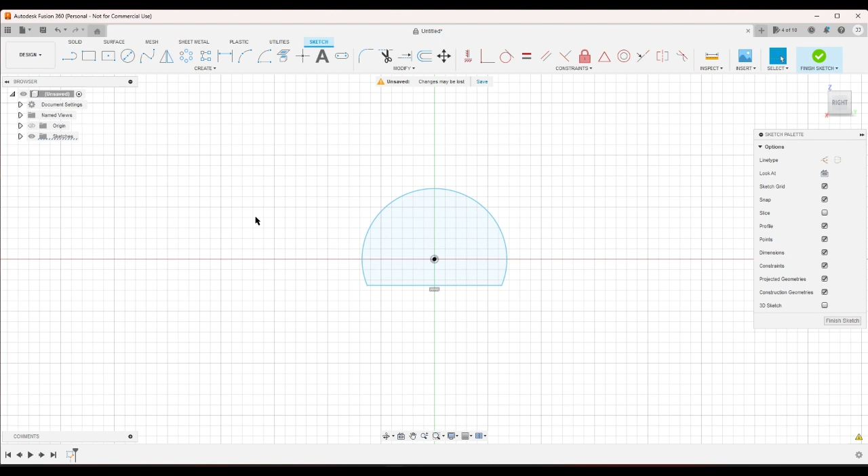So, because the hole in the baking powder is shaped like that, right? Except it's rounded off. So I measured out the diameter of that hole there. It says 53.3 millimeters. I'll make it 52 millimeters. And I'll make a line that goes across. And I'm going to go ahead and offset this by about 1.2 inwards.

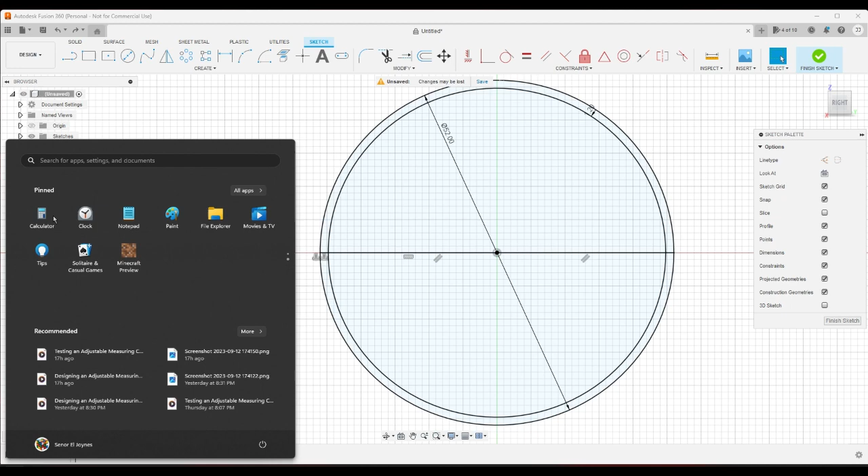Alright, so now since this is 52 millimeters, that makes this 52 minus 2.4. So I'm going to make a line here, make it 52 minus 2.4, and I get 49.6. Okay. I did not feel like pulling out a whole calculator just for that. Oh, you know what? I have to pull out a calculator anyways. Hang on. Where's my calculator? There's my calculator. Okay.

49.6 divided by 2 is the radius, 24.8. Square that, multiply it by pi, and then divide by 2, gives us an area of 966.1 square millimeters.

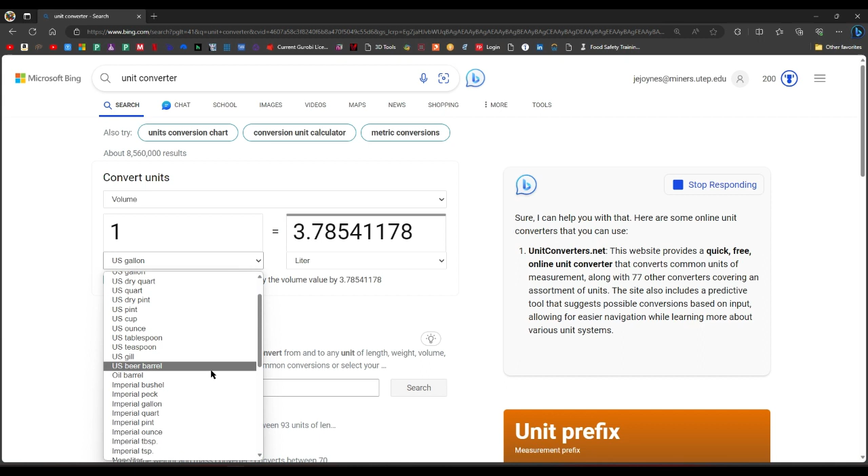Okay, so now we're going to pull up Google, and is this Google? No, it's Bing. Well, Bing has a unit converter too. I'm going to go for volume. I'm going to go for cubic millimeter. And I'm going to go for US tablespoon. And 1 tablespoon is 14,786.7648 cubic millimeters.

So I'll round this to 966 square millimeters, and then I'll round this up to 14,787 cubic millimeters. So now I've got 14,787 divided by 966 is 15.3 millimeters. Alright. So I'll go ahead and extrude this by 15.3 millimeters times 2. I might as well make it 2 tablespoons.

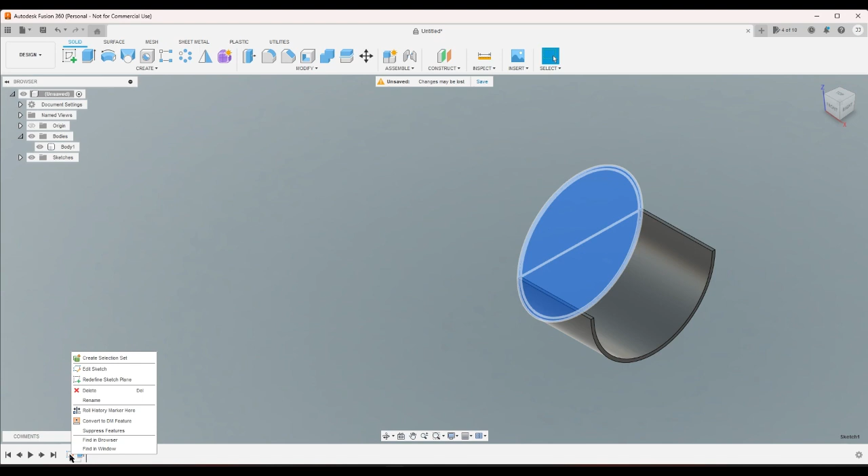Gonna take the sketch and make it visible. I'm gonna go ahead and extrude this whole thing by negative 1.2. And there's that.

Okay, so now what I'm going to do is pull up this and go from tablespoon to teaspoon and go to a quarter teaspoon. 1232.2. That's going to be very small, because if I pull up the calculator, right, I've got 1232.2 divided by 966 gives me 1.27 millimeters.

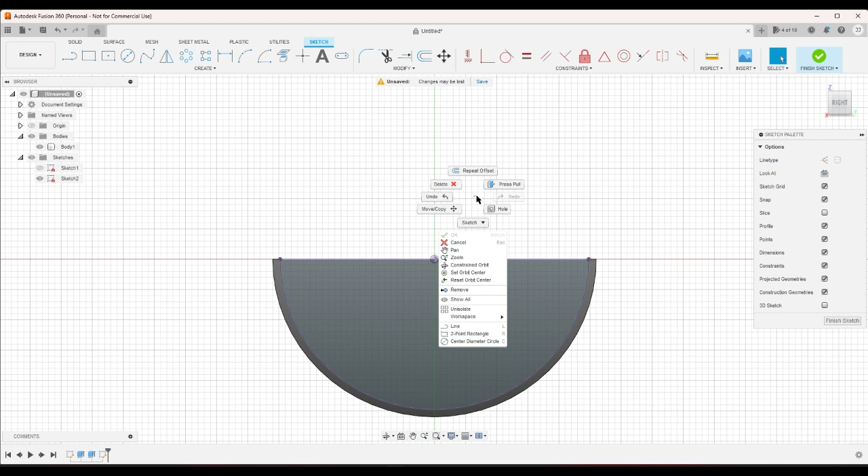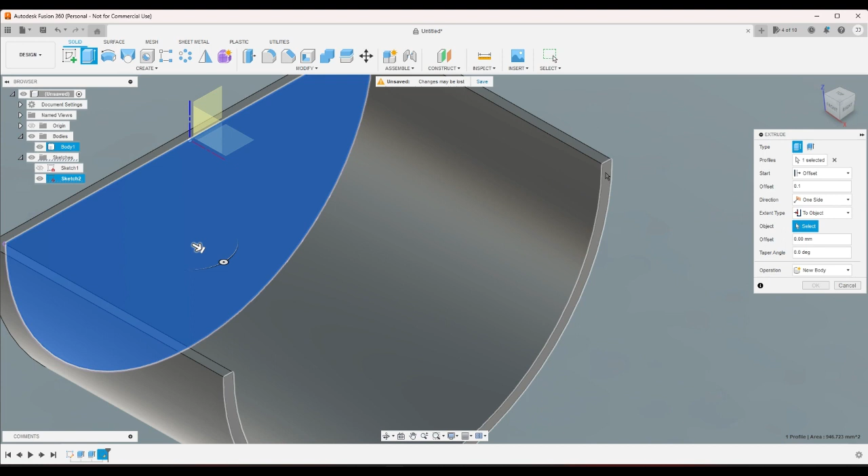So what I'll have to do is, okay, I'm going to project this. I'm going to offset this. Can I? No? Okay, I'm going to go ahead and delete that so I can offset this. Negative 0.25. This will go all the way. Gonna extrude this. Gonna start at an offset of 0.1, and then go all the way to here. And now that's body 2.

Okay. So this is going to be the piece that moves in and out, right? So now I got to make a line here and make it go 1.27 millimeters. And I don't like that right now. I don't like where that is. I'm going to go ahead and change this because I actually don't want it to be there. I'm going to cancel that and then I'm going to change it again.

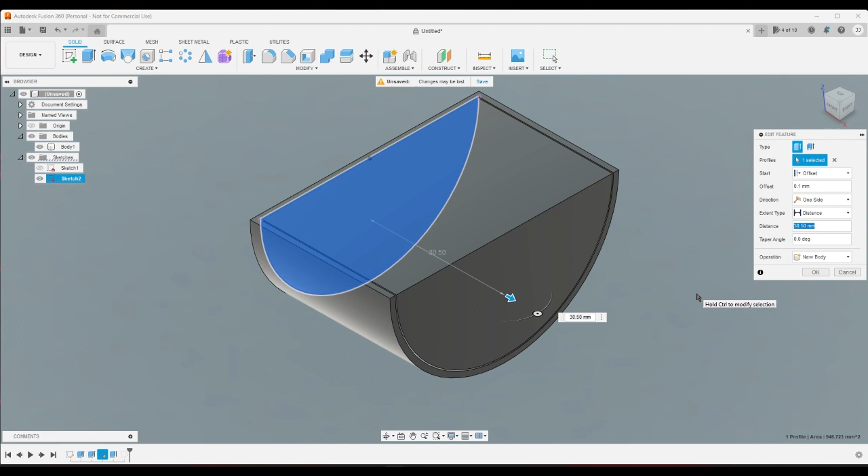I'm going to change it to distance. It says 30.5. I'll make it 40. Yeah. The reason I'm making it bigger is so that I can add a piece to the top of the whole spoon that extends out the back, that this will come into.

So I'm going to go ahead and start a sketch here, no, I'm not going to do that. I'm going to delete this sketch. Now I'm going to start a sketch here. It called it sketch 4 anyways. 1.27 is very tiny, because if I put a hole here, I was wanting to make it about 2 millimeters.

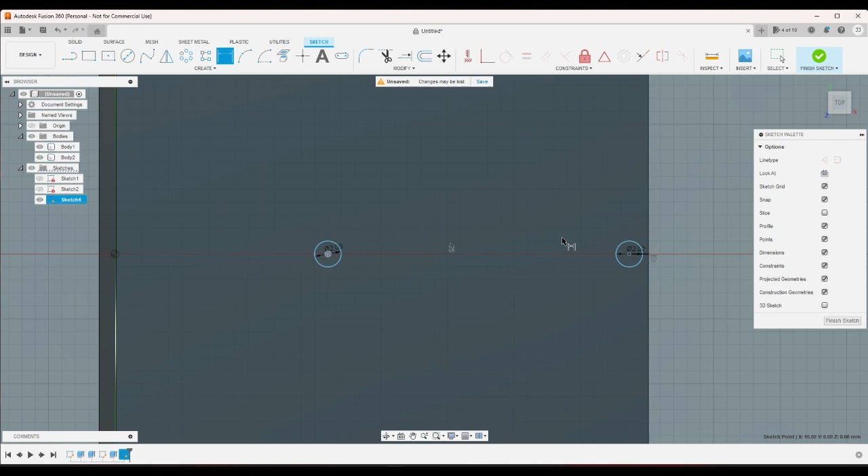Okay, and then I make this perpendicular to this, and then I make another 2 millimeter hole. Put this on the center line with it, and then move these, make that 1.27. That's rough, right? And then make another hole, and then another one, so I get 1.27 times 2 to make a half of a teaspoon. And I really don't know if that's going to work, but I'll design this anyways. So that's a half a teaspoon.

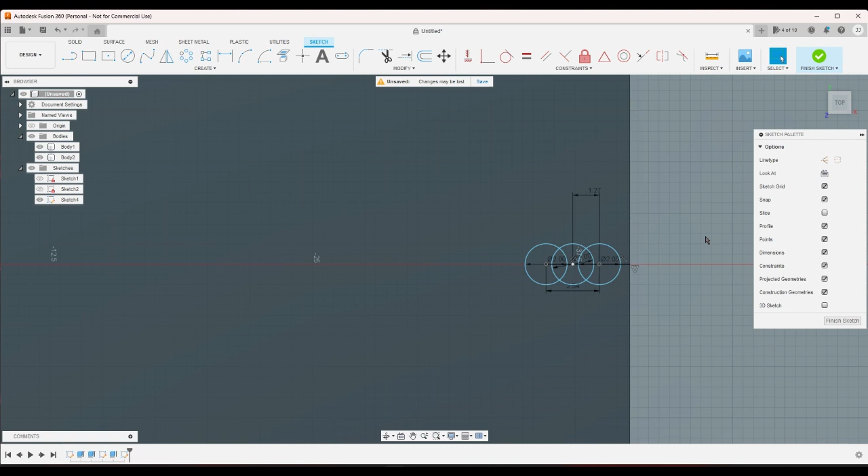I just realized there is also an eighth of a teaspoon. And there's a third of a teaspoon. Anyways, I'll make the whole teaspoon now. So that's 1.27 times 4, right? And that's the whole teaspoon, right? So I've got, this is the 0 point, this is a quarter teaspoon, this is a half teaspoon, this is a teaspoon.

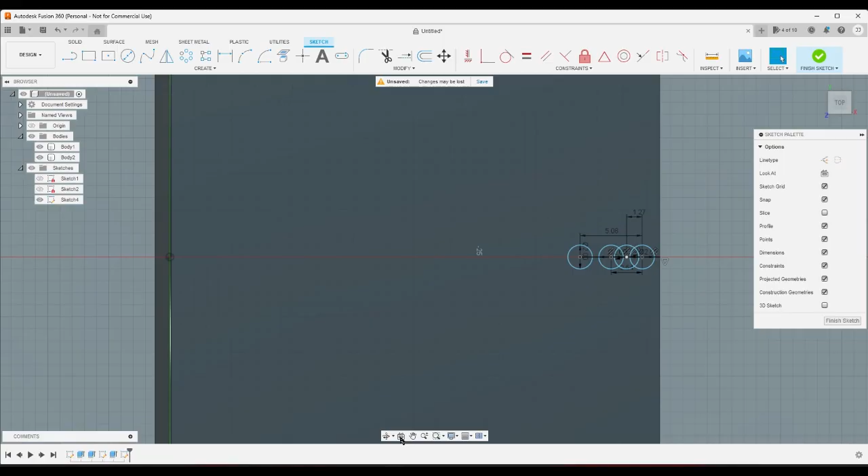Then if I go up to a quarter tablespoon, I get 3,696.7. So 3,696.7 divided by 966 is 3.82 millimeters. So if I make 3.82, that is almost, that is interesting. That's less than a teaspoon. In fact, that's like 3/4 of a teaspoon.

Let me see that. 1.27 times 3 is 3.81. Yeah, that's 3/4 of a teaspoon. 3/4 of a teaspoon is a quarter tablespoon. So I'll take that, make it go 3.82 times 2. That's a half a tablespoon. And then 3.82 times 4, that's a tablespoon.

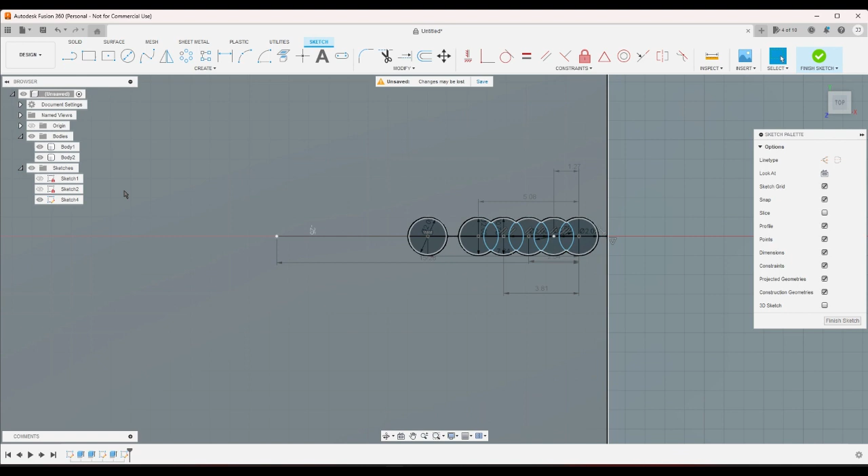And then I do it 3.82 times 8, and that is 2 tablespoons. And they are very close together. So something I can do to make them farther apart is change this original sketch to make it smaller so that it would have to be longer. And I think I'm going to do that. So I'm going to change the outer edge to, say, 46.

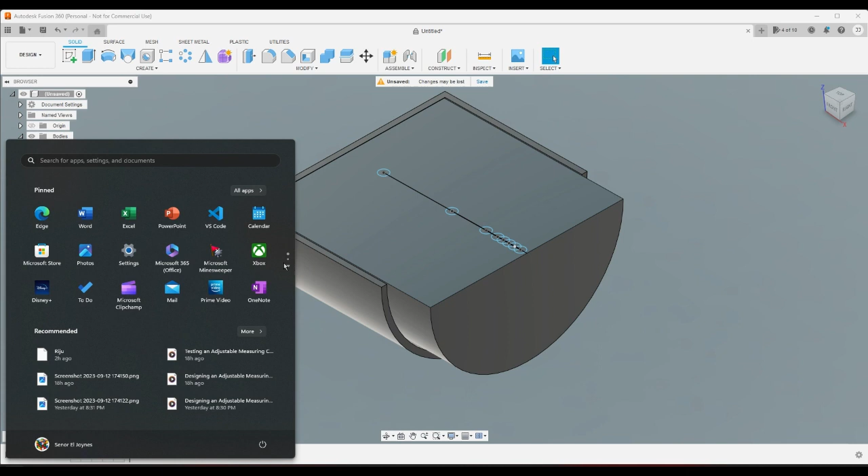So now I've got to calculate, where's the calculator? I closed the calculator. So now I've got to calculate the area with that. So then 46 minus 2.4 is 43.6. Square that. Multiply by pi. And then divide by 2 because it's a half circle. And I get 2,986.02. So 2,986 cubic millimeters. Or square millimeters, sorry. That doesn't make sense. Hang on. I said 46 minus 2.4 is that. Square that.

Okay, that's wrong. Hang on. 46 minus 2.4. I don't know how to use this stupid calculator. Square it. Then times pi. Pi r squared. And then divide by 2. 2,986.02 square millimeters. That doesn't make sense because I had 52 minus 2.4, and then squared, and then times pi, and then divided by 2 is 3,864.4 square millimeters.

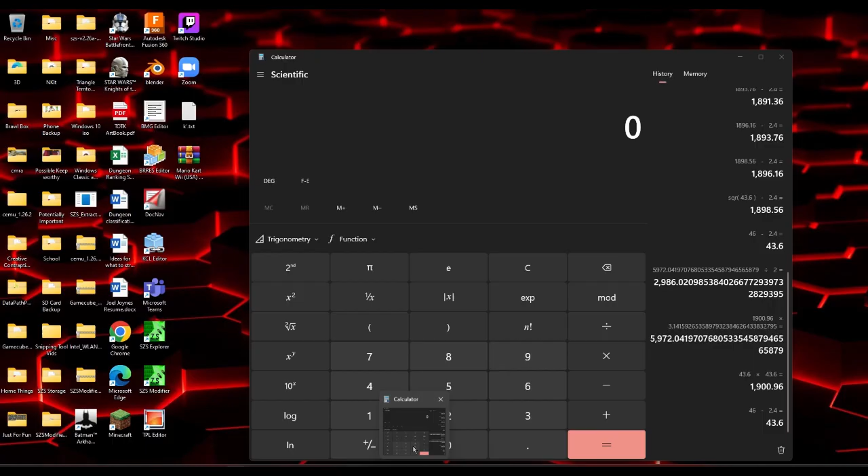And then if I go to 2 tablespoons, I get 29,573.5. And if I do 29,573.5 and divide that by, what is the most recent number in here? Square 49.6. Okay, times pi is this, then divide by 2. So I divide by 3,864.4 and I get 7.65. That's how many millimeters that would have to be. I didn't do that right. That's interesting. Okay.

So, I'm going to change this to be about 30, right? I'm going to change it to be 32.4. Alright, so the internal area is going to be pi times 900 divided by 2, because 30 squared is 900. Multiply that by pi. And then divide by 2, and I have this many square millimeters is the area of that half circle. So now, I'm going to go ahead and take the 2 U.S. tablespoons, 29,573.5295, or call that 0.5.

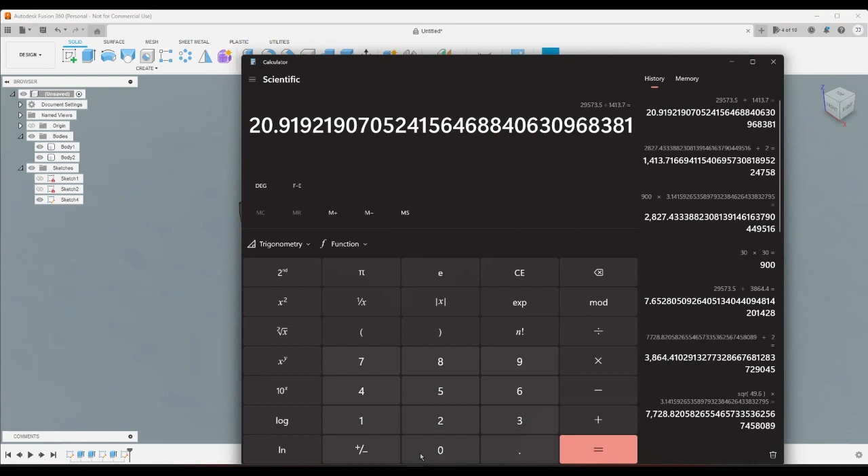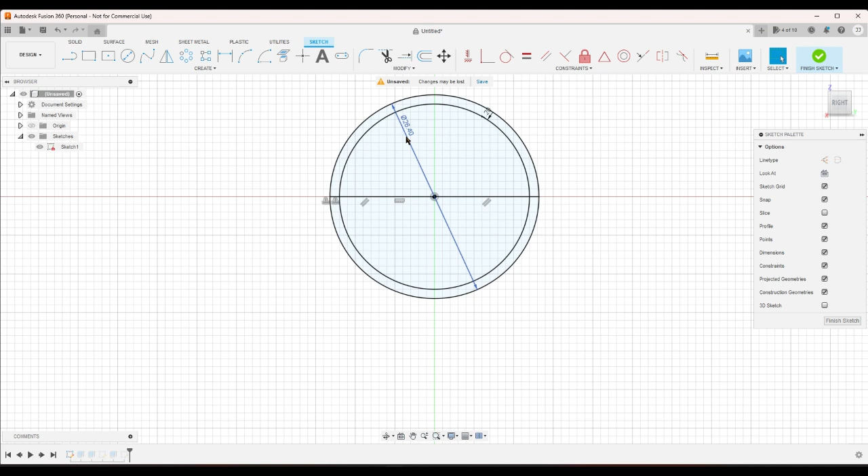So, 29,573.5, divided by 1,413.7 gives me 20.9, or 21. So I take this and I make it 21. I don't like that. That's already shorter than it should have been. Let me get rid of this second body here. I think the squarer this cavity looks from this angle, the better it will be. So, let me reduce this again to about 26.4. Okay. 26.4. Alright. Minus 1.2 on both sides is 24. Okay.

So now if I go to my calculator, 24 squared. Oh, I know what I did wrong. I know exactly what I did wrong. I forgot to take half the diameter. So, if I go all the way back to 46.4, right? Now, 46.4 divided by 2, because that's the radius that I need, and then square it, and then times pi, and then divide by 2, gives me 845. That's still going to be too small.

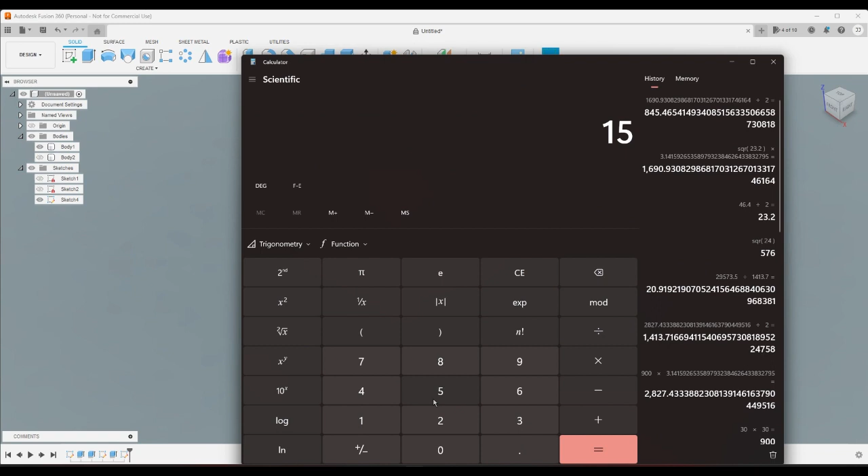So I'm going to actually change this to, probably the 30s will work better. 32.4. Right? So that'll be 15 squared times pi, then divided by 2 because it's a half circle, gives me 353.43 square millimeters. Now I take the 2 tablespoons, which is 29,573.53, divided by 353.43 gives me 83 millimeters. That's too many. Because that's taller than anything.

So, somewhere in between 32.4 and 56 is the magic number. Call it 42.4, so that would be 40, right? Half of 40 is 20, so 400 is the square of that, right? So 400 pi divided by 2 is 628.32 square millimeters. I take the 29,573.53 divided by 628.32, and I get 47.06, right? Which I can probably just make 47. I'll make 48.

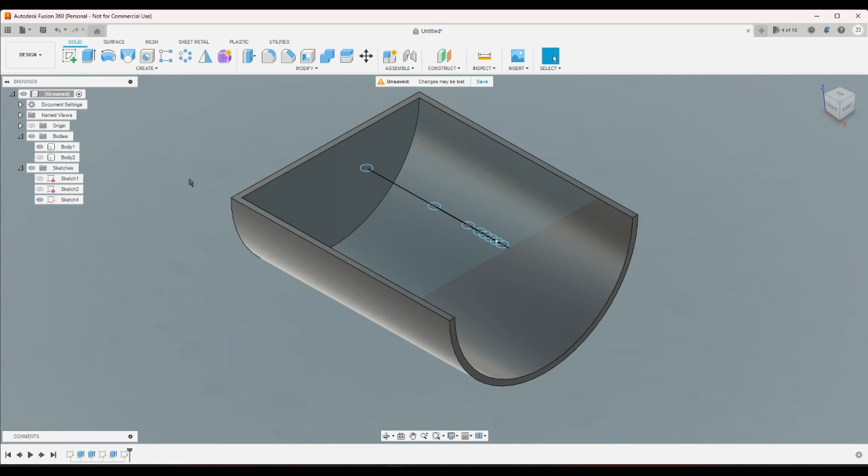But now I can take body 2 and then, it was 48. Okay. I'll make the extrusion for body 2. No, that's not the extrusion for body 2. This is the extrusion for body 2. And make it 58 for now. Okay. Actually, this should be 58. And this should be 68.

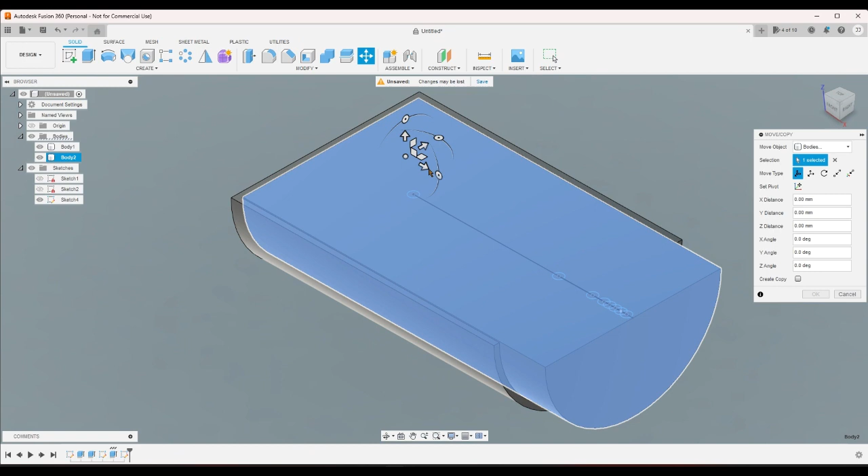That way on this sketch, this one will be 48, right? Because I would move this in this direction by 48, right? That would be 2 tablespoons, and there would be this much holding it together. So I should also have more space to make the holes that I wanted.

So if I take and go from 2 US tablespoons to a teaspoon and make it a quarter, I get 1,232.2 cubic millimeters, right? And I'm working with 628.32, right? So I take 1,232.23 divided by 628.32, and I get 1.9 millimeters, which is better, but it's still pretty short. But I'll take it.

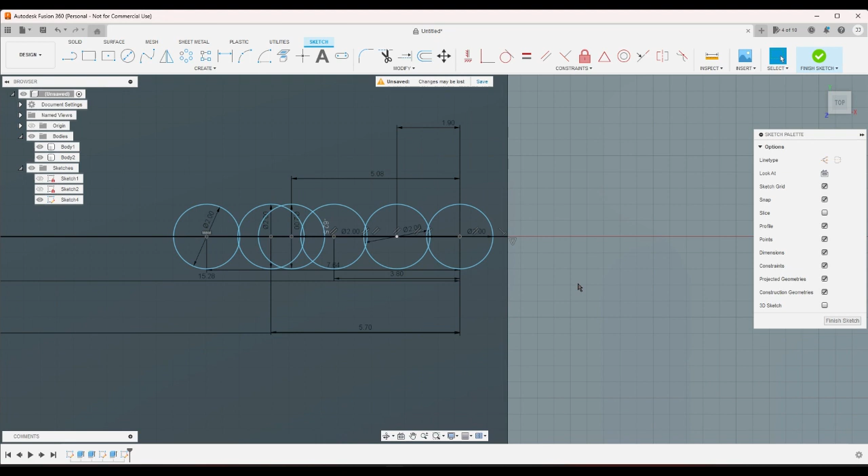1.9, and then 1.9 times 2, and then 1.9 times 3, and then where was this one? This is the 1.9 times 2. This is the 1.9. So this one right here. 1.9 times 4 gives me the teaspoon. And then this one here is going to have to give me the half tablespoon, which should be 1.9 times 6. But I don't think so.

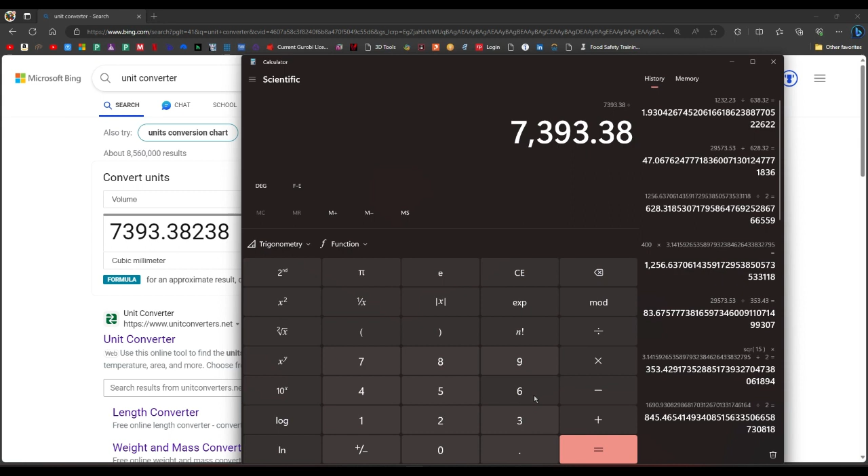Let me just check. So if I go to tablespoon and go to a half, I get 7,393.38. So 7,393.38 divided by 628.32 is 11.77. So this should be 11.77, gives me a half a tablespoon. Control Z. This one is that. Alright. And then that's a half a tablespoon. This is a tablespoon, right? Because I would just multiply by 2 to get a tablespoon.

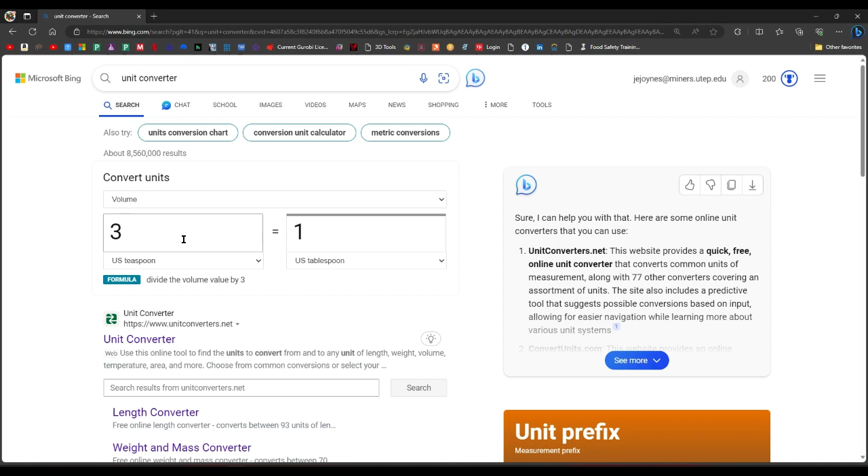And then we've got 0, quarter teaspoon, half teaspoon, 3/4 teaspoon, which is also equal to 1/4 tablespoon, which makes sense because 3 teaspoons make up a tablespoon. If you look at this, it goes U.S. teaspoon and U.S. tablespoon. If you put 3, you get 1. Okay, yeah, it's 3 teaspoons for a tablespoon. So that makes sense.

Have I ever used a recipe that called for 1/8 of a teaspoon? I think I've seen 1/8 of a tablespoon. Right, so this was 23.54, this is the tablespoon, 23.54. Let me see what 23.54 divided by 8 looks like.

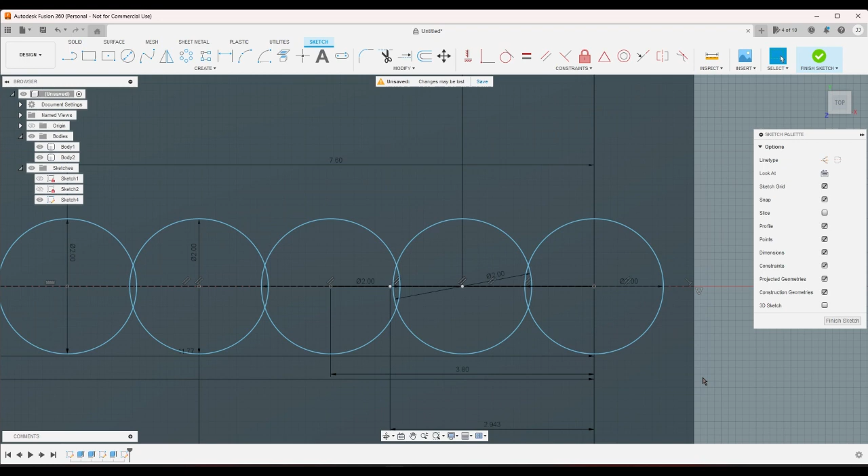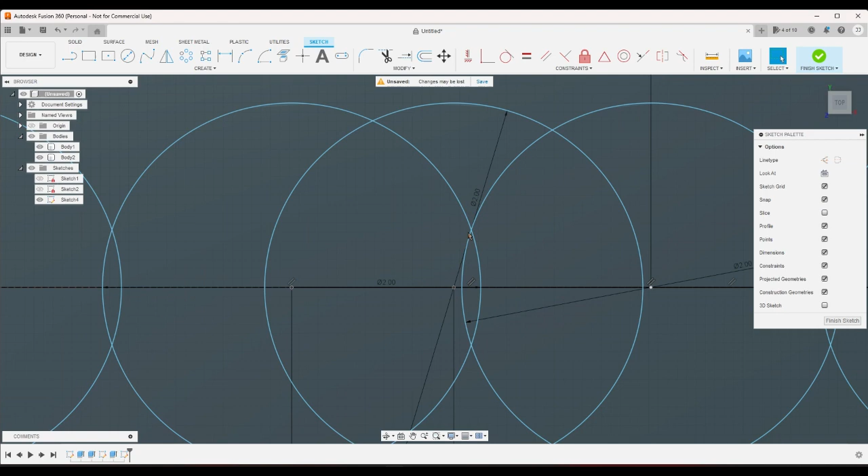Okay, and then there's 1.9 times 2. Let me just Google it. 23.54 divided by 8 is 2.943, and I've got a 3.8, and I've got a 1.9. There it is. And that is 1/8 of a tablespoon. I do not like that. I do not like that one bit.

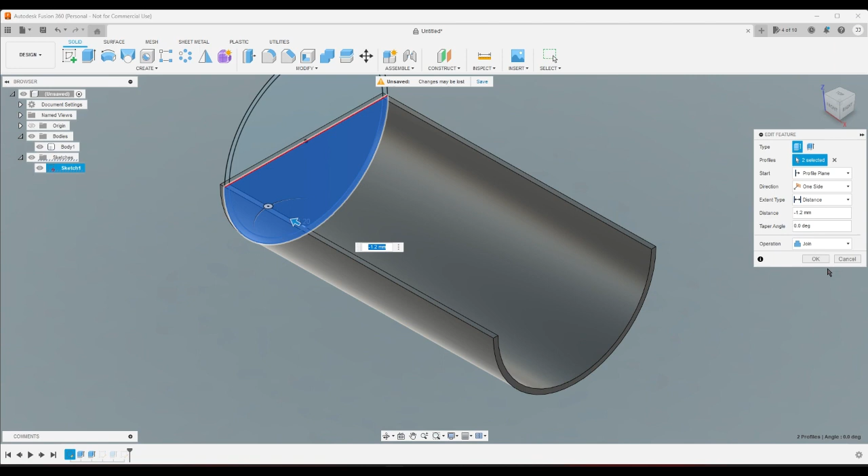What if I took this and took the 58, changed it to plus 10, plus 10, 48 times 1.25. And then I take this, no, this one, 48 times 1.25 plus 20. And then I take this sketch and then multiply everything by 1.25. Except for that.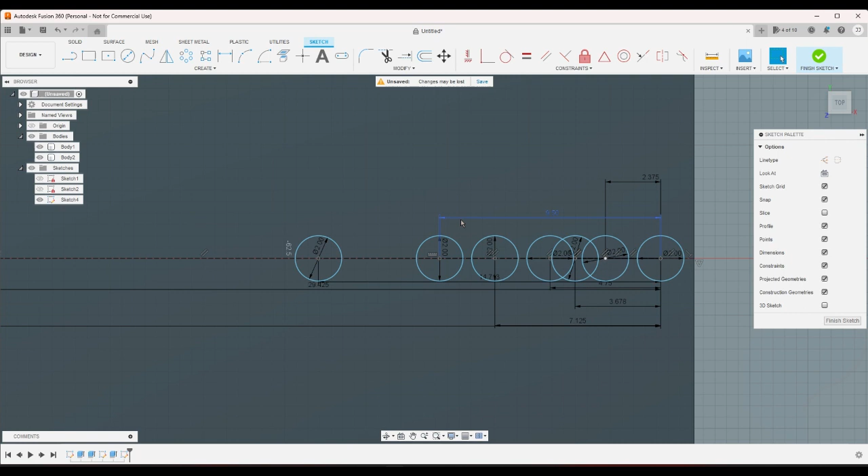Okay. So I've got this one, I've done this one, I've done this one, this one, what the heck? Okay, this one, okay, and then this one, and this one. Okay, everything's times 1.25. This might have issues, but other than that, it should be fine.

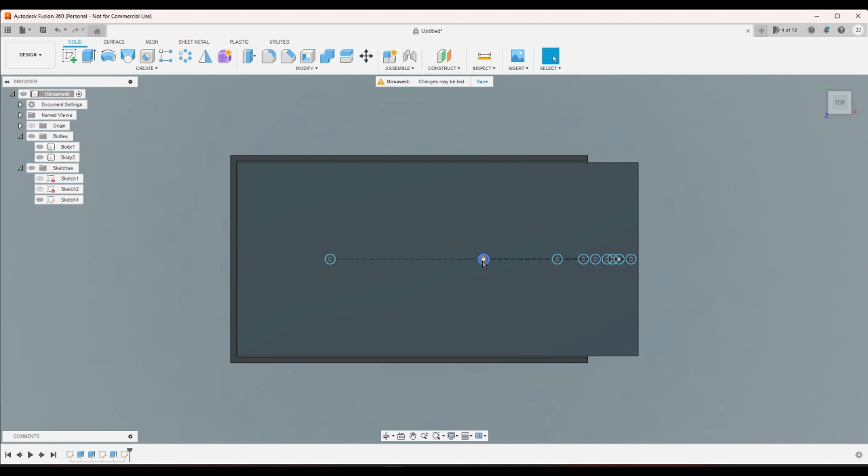All right, and then 60 is really tall. It's really darn tall, but it can still go inside of the baking powder. It does become really annoying though, because if I ever need 2 tablespoons of baking powder, which I never will need that much baking powder, right? I'm probably gonna only ever need a tablespoon. So okay.

So if I extrude all of these into smaller holes, into little holes, -3, just to be safe. This is what I'm scared of. This is what I'm scared of.

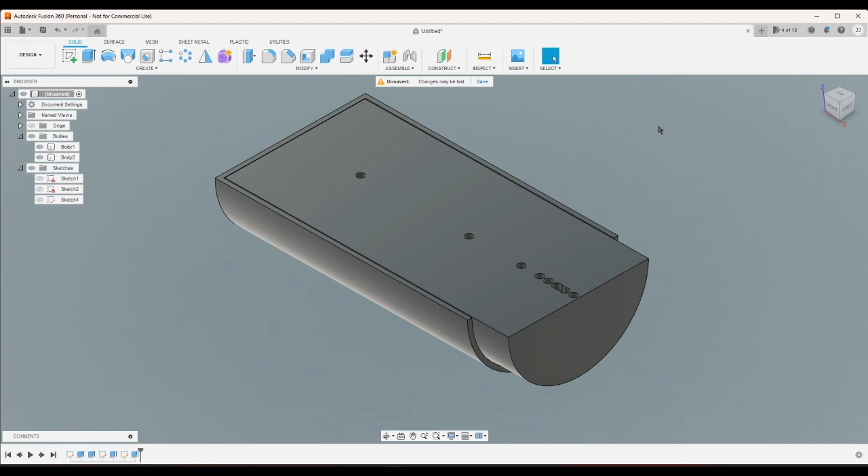Okay, so now what I'm going to do is I'm going to make a sketch here. I'm going to go ahead and make a rectangle that extends past this. I'm going to make this collinear with this. Then I'm going to project this hole here. That's the 0.

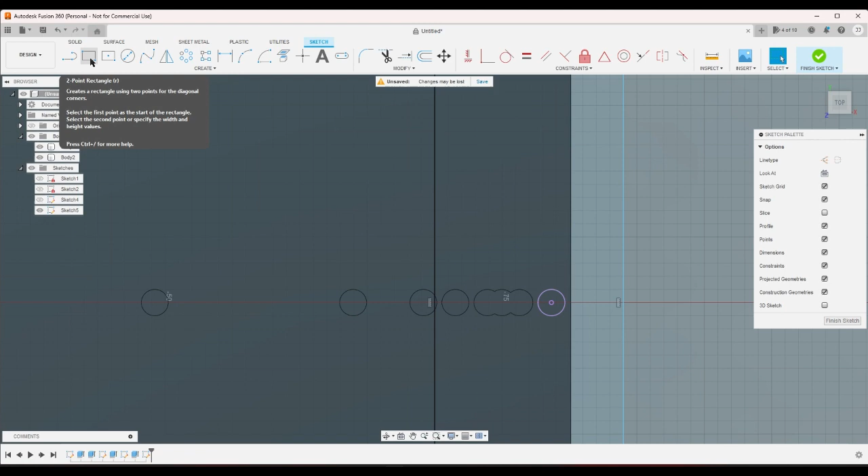Then I'm going to make another rectangle and I'm going to make this, then I'm gonna go ahead and make an offset of this rectangle, make it 1. And then I should be able to move this up and down, right? Yeah, okay. So now I'll make this one collinear with this.

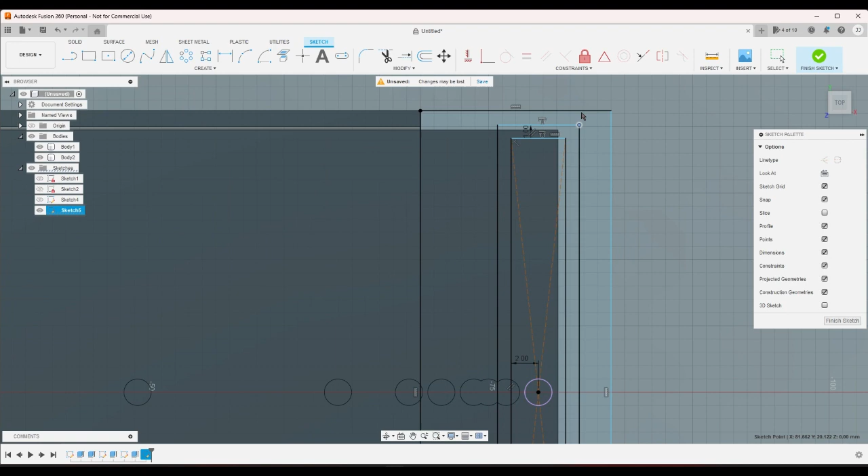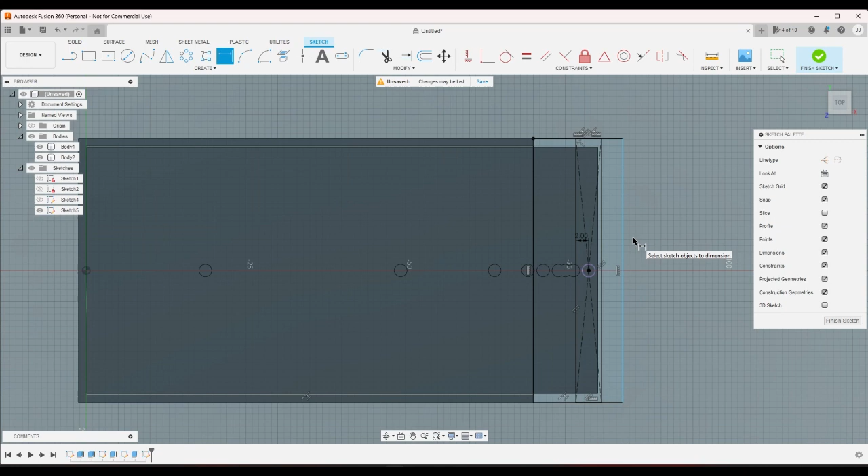Fail to solve. Did something snap to something? Okay. Okay, whatever. Just dimension from here, there, then offset 1.

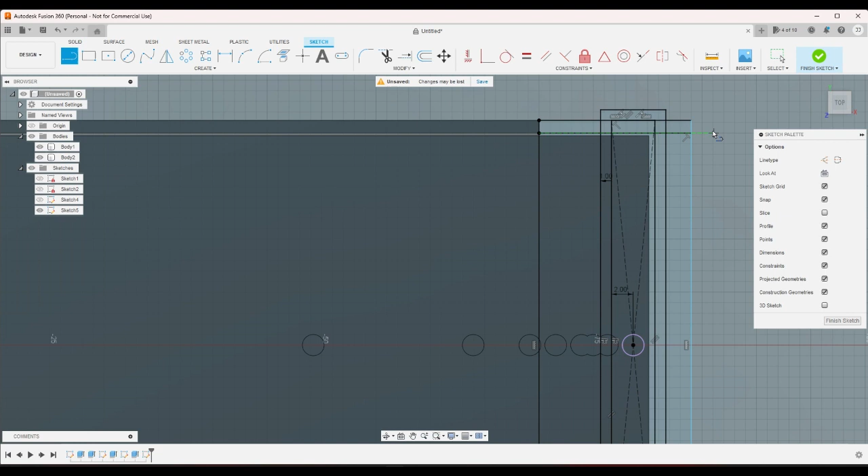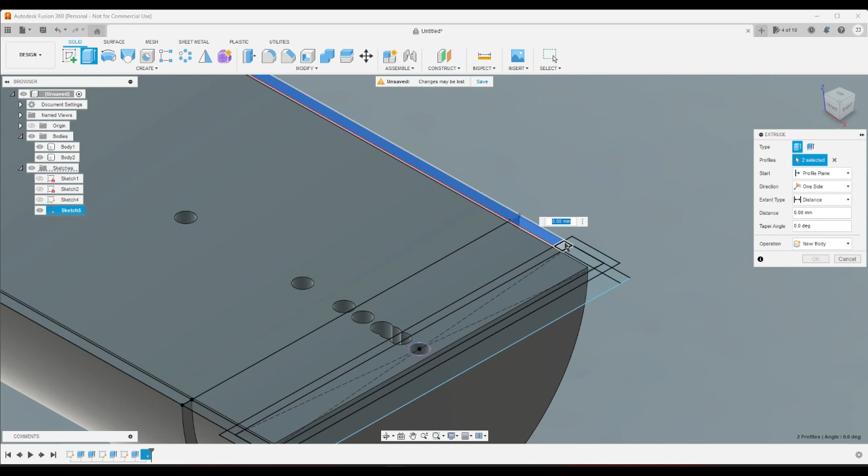Put a line here. And a line here. And put rectangles on this. Put them over here. Alright, so what I'm doing here is I'm creating a geometry here.

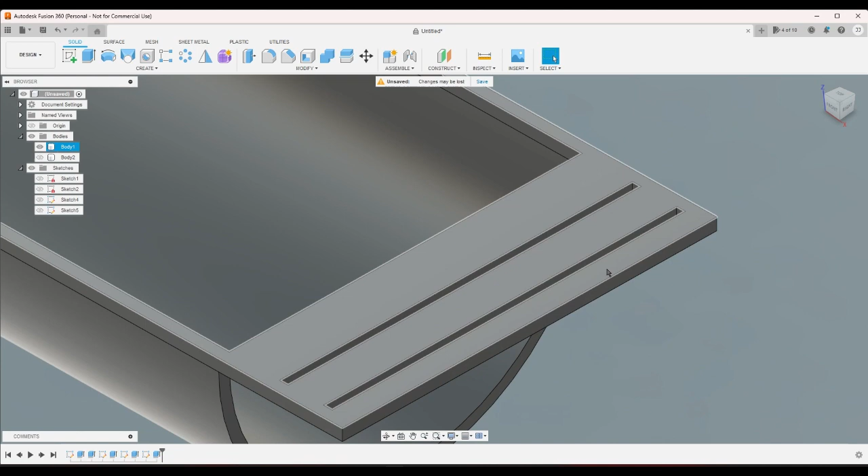I don't know, about, no, 1.4 should work. So hopefully this will be thin enough that that middle bit can move up and down, right? And I'm going to go back into the sketch. I'm going to offset this circle by negative 0.1. And then I'm going to bring the sketch, hang on.

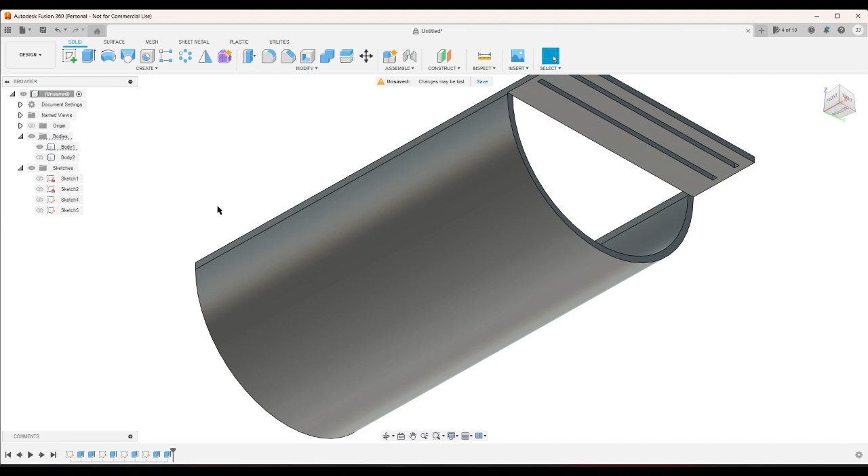I'm going to extrude this up by that much, and then I'm going to bring the sketch back, and then I'm going to extrude this circle, and then I'm going to make it disappear. And I'm going to start at an object here, and it's going to be a distance of 1.25. No target body found to cut or intersect.

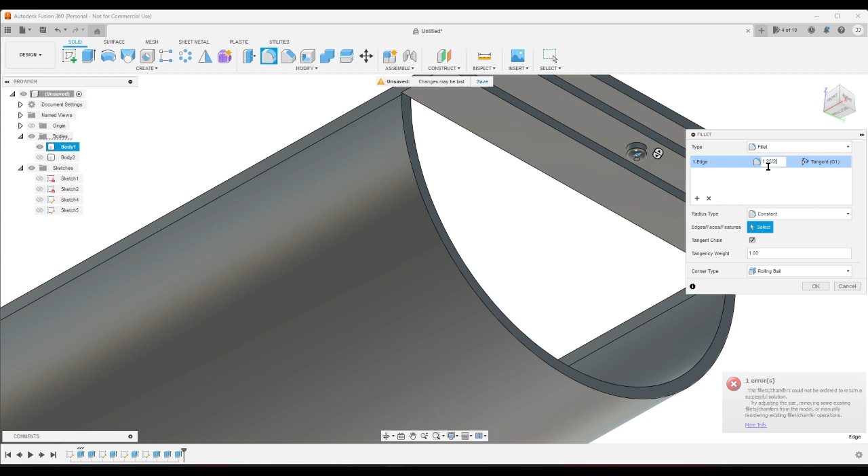Then I'm going to fillet this as far as it'll go. I'm going to change that. Okay, so I'm going to bring back this body. So hopefully this will work to do that. Okay, and now what I would like to make a...

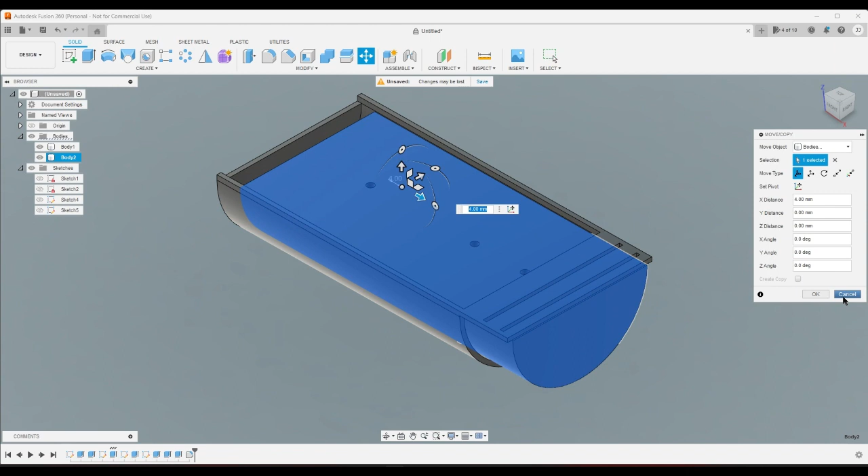I think I'm going to write with a pen the actual numbers, because I don't think I have enough space to make letters here. But the idea here is that this piece is going to move in and out, and it's going to be held in by all the intersections here. And it's going to click into place with these holes, right?

And I feel like this is a better design than the measuring cup, because the measuring cup was basically the same idea, but the piece was not in a fixed spot. This piece here was not in a fixed spot, it could wobble. And I really need it to not wobble very much because this is a bunch of really small, tiny pieces.

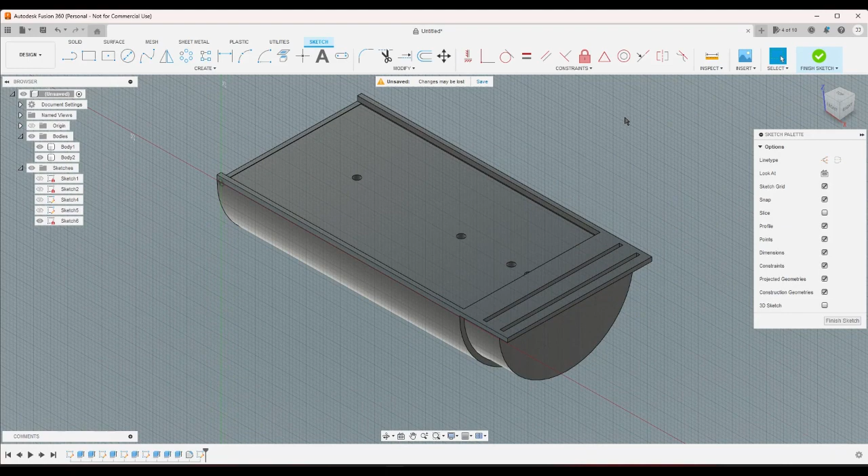I would like to make a separate piece that somehow attaches to this. Yeah, because if I move this all the way under here, yeah, okay. So I'm going to start a sketch here. I'm going to project this plane here. I'm going to extrude this by about 2 millimeters.

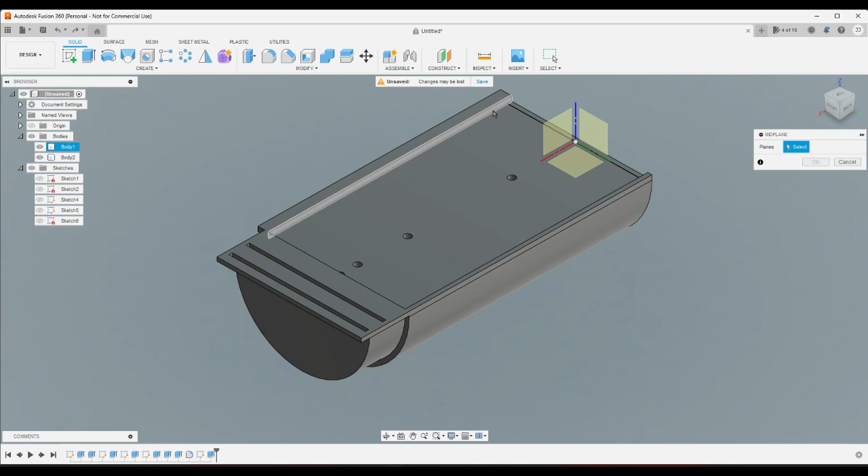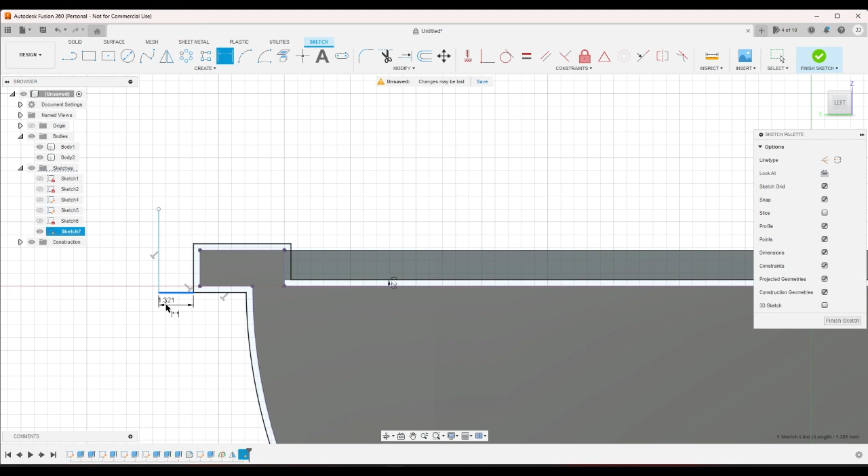So I'm going to make a sketch on this plane here. Project all of this. Offset it by 0.25. Okay, so I've got 47. Add 4 to 47, you get 51, and this only has to be 1.2. The total was 56, so this should still fit. It'll be a little snug, but it should be fine.

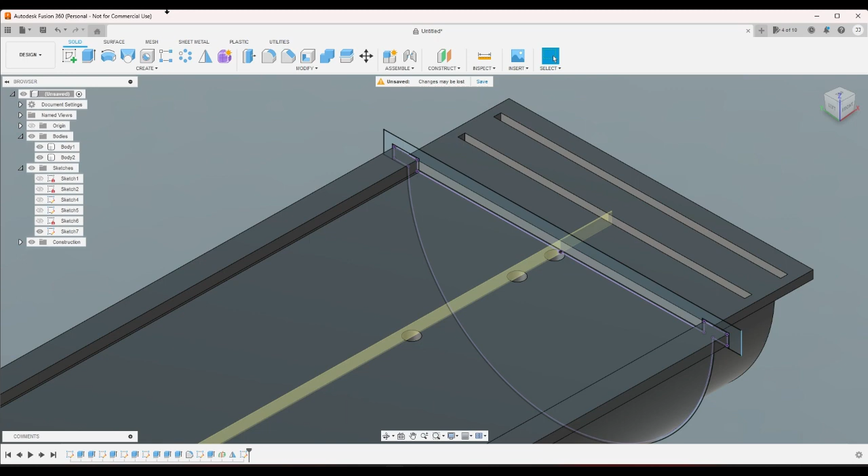Extend this, and then trim it. And then dimension from here to here is 1.2. And then I'm going to extrude that. Whoops, hang on. I forgot to... vertical 1.2. And same thing on the other side. Make it 2 actually.

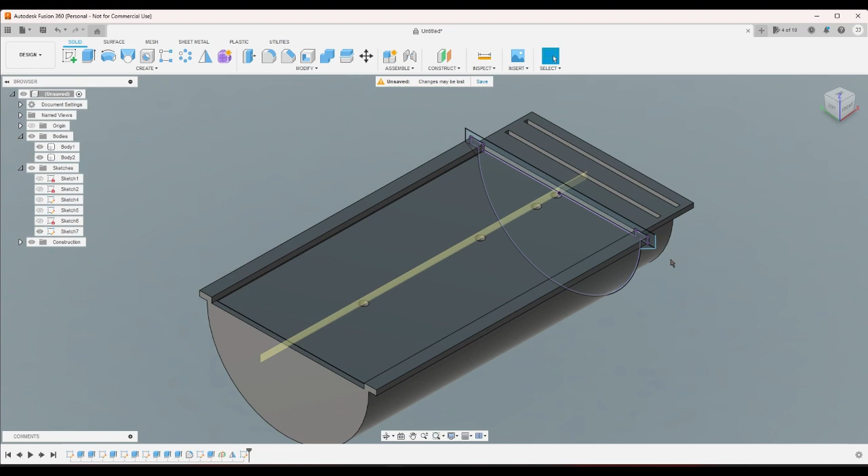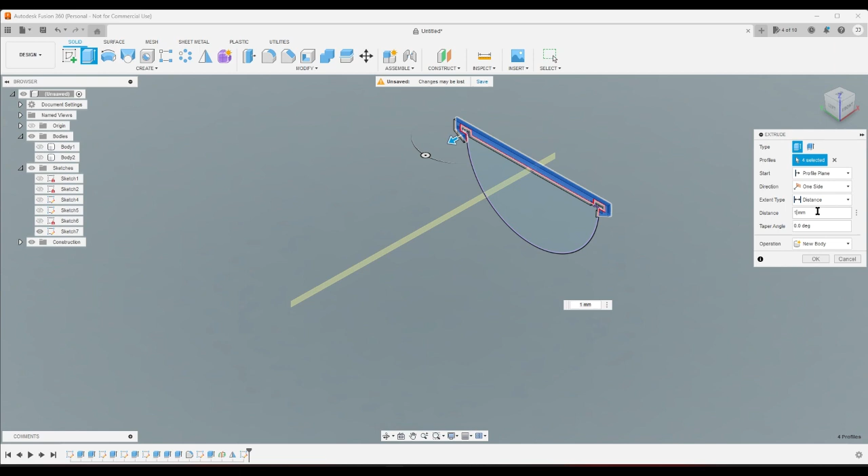Extrude all of that now. And this is a piece that will slide back and forth to level off the measurements. Get rid of the 2 bodies, and then, did not want to include that. Yeah, there we go. Make it 2. Alright, so now I've got 3 bodies: the actual cup part, the actual measurement part, and this thing here that will level off the measurements.

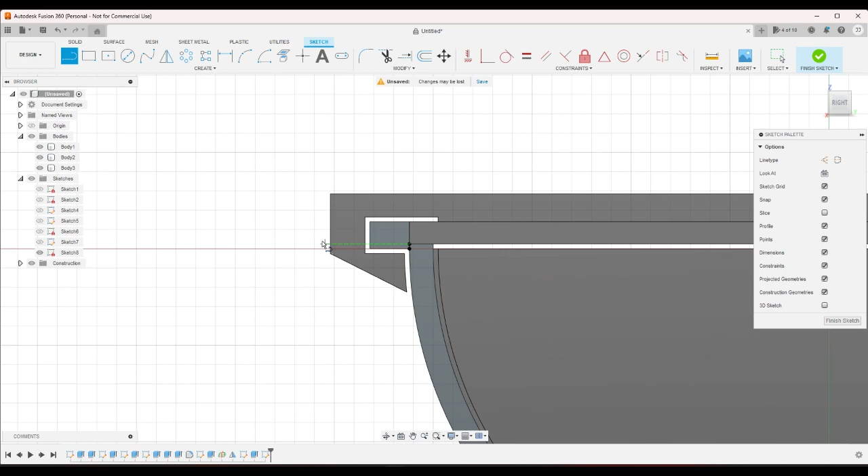I'm going to do something. I'm going to extrude, not that part, not that much. Okay. Make a sketch here. Line going all the way down to there. And there. I'm going to extrude this all the way to here.

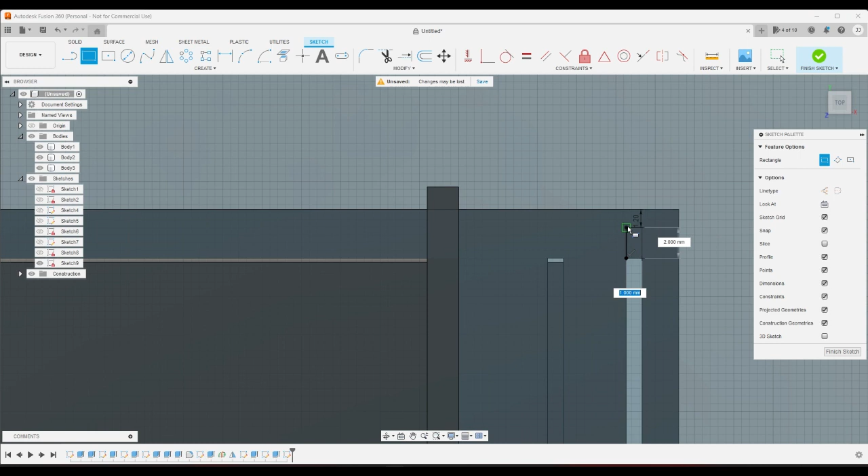The reason I'm going to do that is so that I can add in this little extra bit of space. So dimension from here to here. Yeah, okay. Then I'm going to make a rectangle there. And make a rectangle here. Make this one collinear with this one. And then make this height equal. And then put a midline here. Mirror these. And then cut these out.

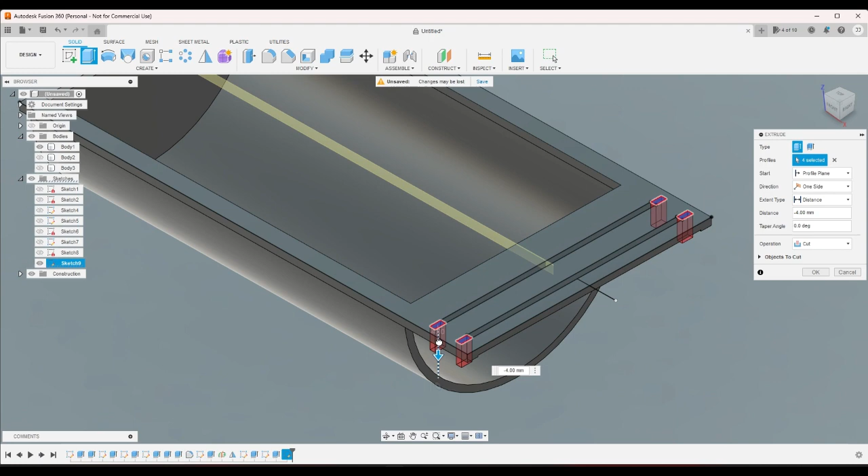Okay, that should give it a little bit more wiggle room. It literally needs more room to literally wiggle. So this is just a concept. This is just one proof of concept. So, yeah.

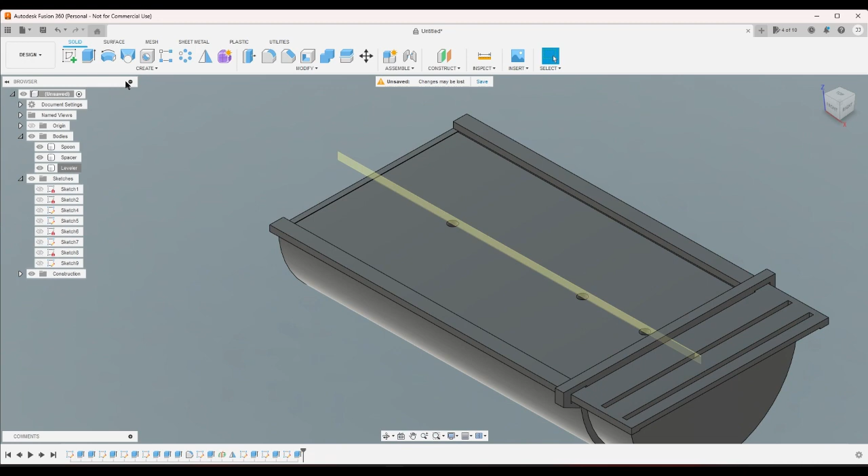I'm gonna rename these now. This is the cup. Well, this is the spoon, actually. And then this is the... I think I'll name it spacer. That's more descriptive of what it does, I think. Name this leveler. And then I wonder if I'll have enough wiggle room to do this.

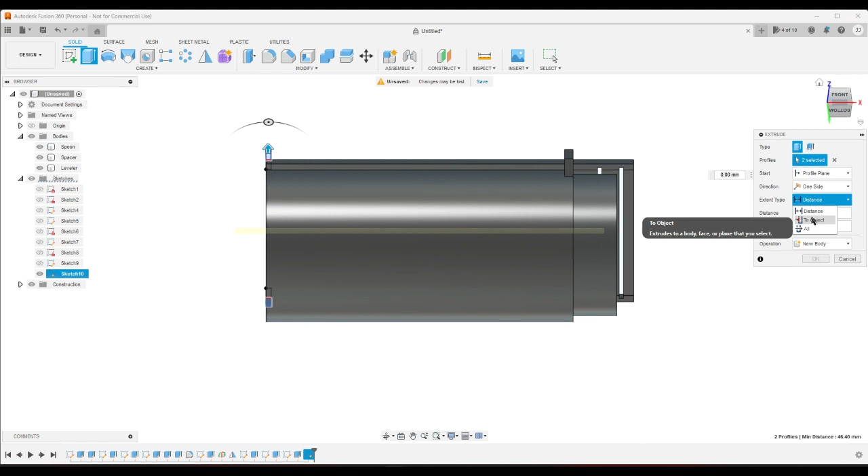I don't know if I'll have enough room to actually do that. But the idea here is if I have enough room to be able to bend it enough to snap this into place, then the leveler will become a permanent fixture in the device. Also, it doesn't have to be very big. Yeah. That way I can move the leveler all the way.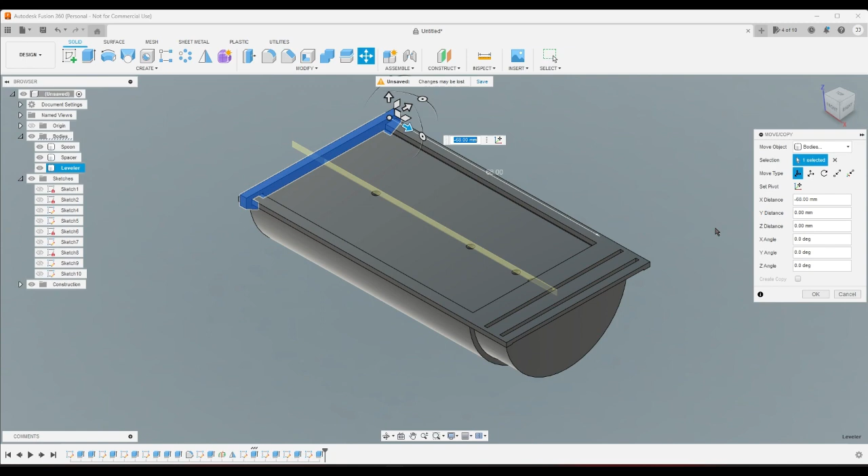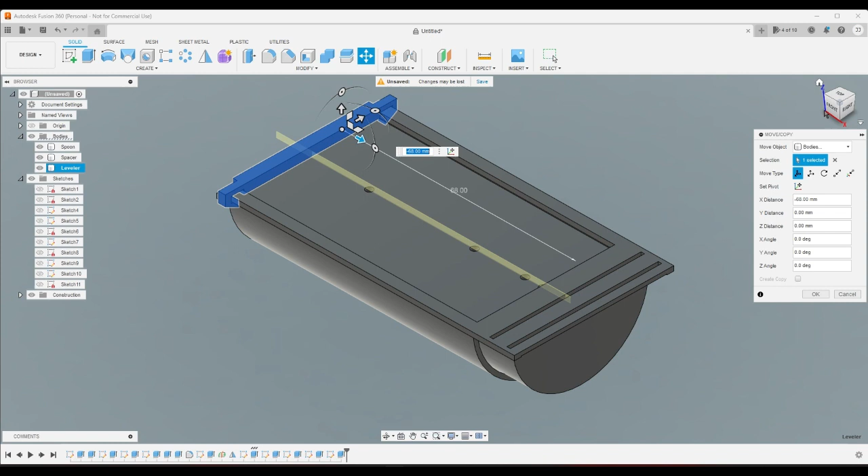And in order to do that, though, I'd have to also bring this out some, like a millimeter or two. I think that's right, right? Let me check. Yeah, okay. So I'll go ahead and export these and print these out. And they're small enough that I really don't have to cut anything out, because it's a measuring spoon, you know.

Oh, I thought of something. Sorry. It's okay. I thought of something.

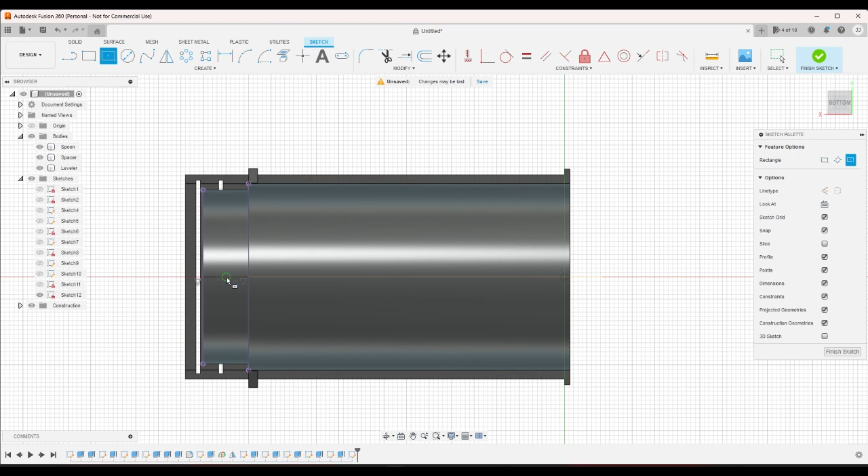Why did it fail to solve? I don't know. Where is the midpoint? I don't know, that looks good enough. And yeah, okay. And then I'm gonna make a plane, add an offset from here, bring it way down there.

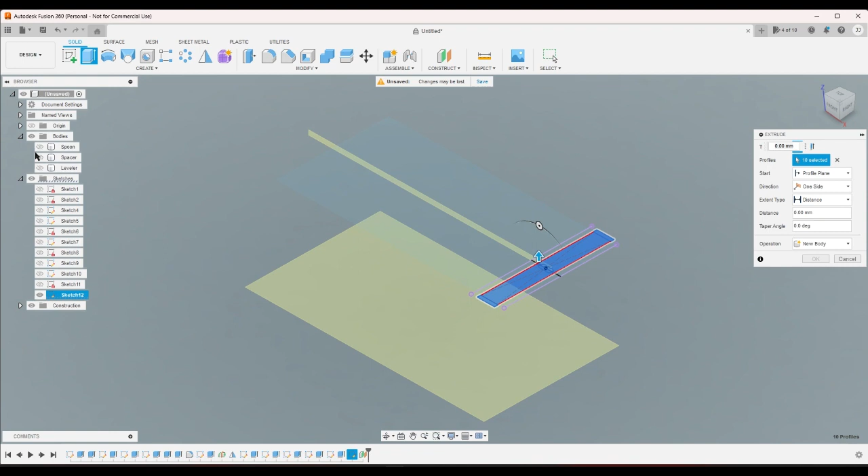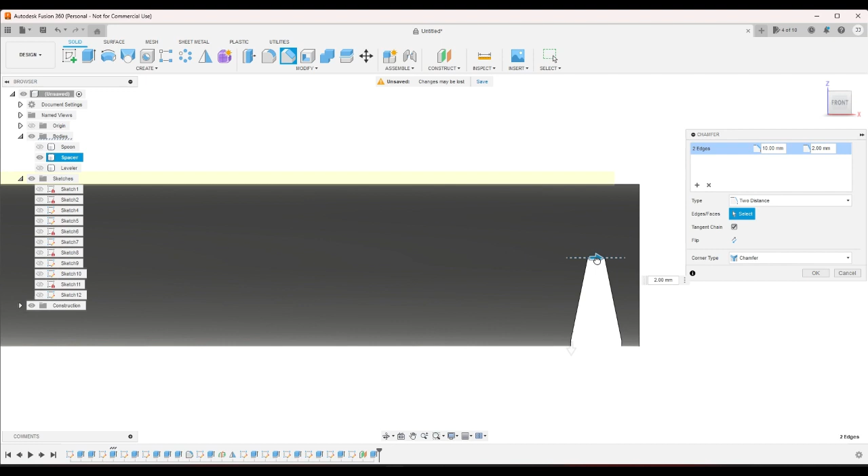I'm gonna go ahead and extrude all this stuff. I'm gonna start it at this plane. I'm gonna pull it up to about there. And then I'll go ahead and chamfer these edges here. 2 distances. All the way. And then I'm going to go ahead and fillet them.

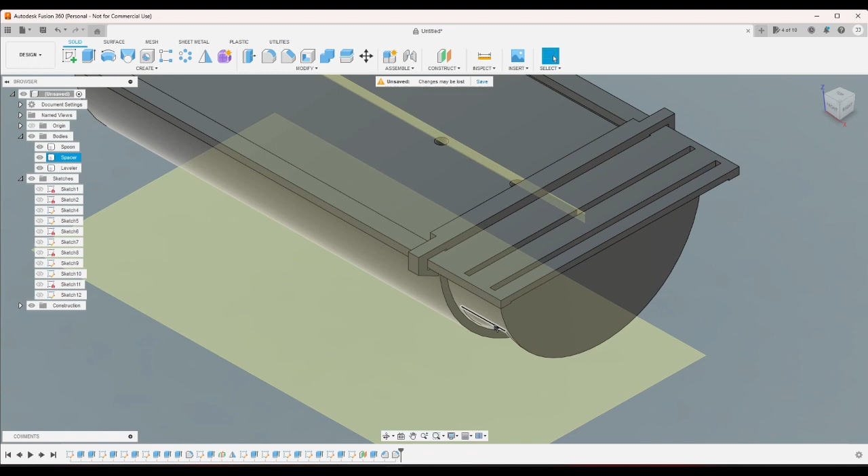That ought to work. Okay, so what that is, that's a place for me to grip with my thumb. I can stick my thumb in this area here. So that's what that is. So now I should be able to go ahead and export these and see if they work. And hopefully they'll work.

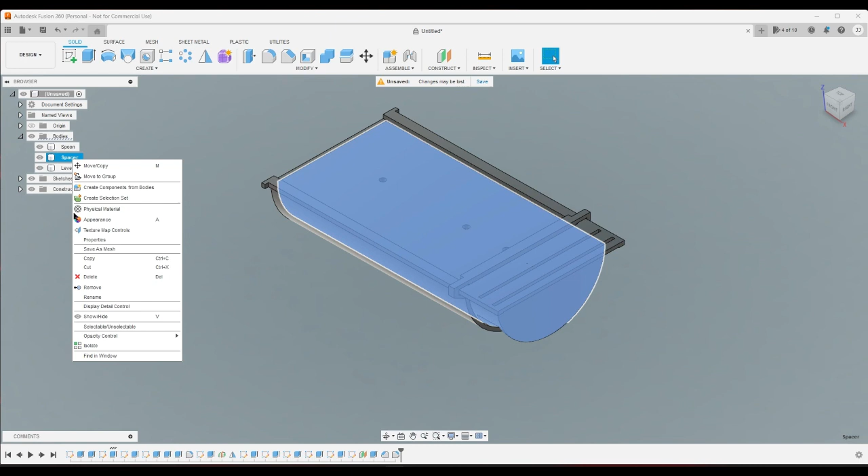So, save as mesh. Okay. Let's see, AO measuring cup. Let me rename this measuring cup and spoon. And then I'll make a new folder and call it measuring spoon. Okay, save. Save as mesh. Save. Okay, save as mesh. Save.

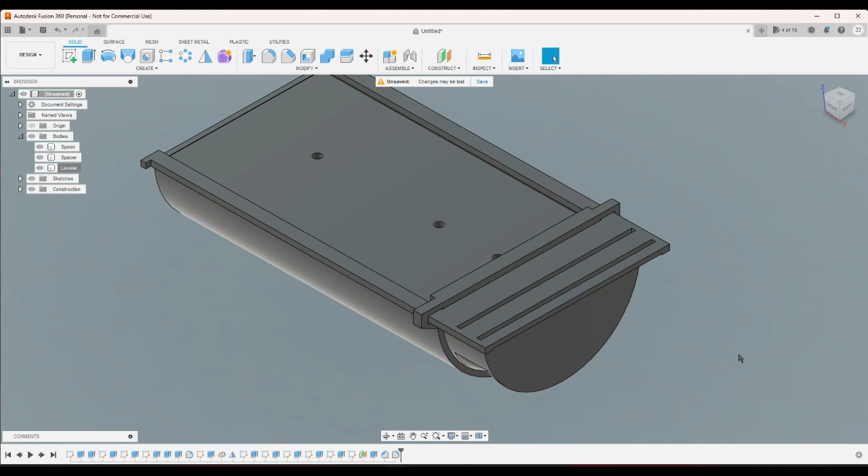Alright. So this will be a test of the function of the mechanics. If this works, I will go ahead and try to add a window here so that I can show off what the actual measurements are, and I'll add an actual handle to this. Also, I'm gonna print this in this orientation with no supports, then this in the same orientation, and this I'm gonna print in this orientation.

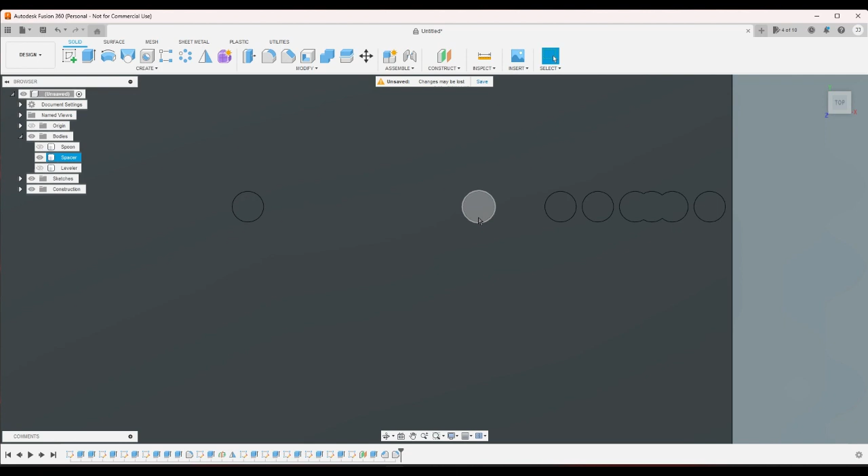So hopefully this will all work fine. It probably won't though, because, look at that spacer. I got 3 right here, and I don't even remember what these measurements were. I know this is the 0 point. This one is a 1/4 teaspoon, which puts this one at a 1/2 teaspoon, 3/4 of a teaspoon, or a 1/4 tablespoon, a teaspoon, a 1/2 tablespoon, a tablespoon. And this one's an 1/8 of a tablespoon.

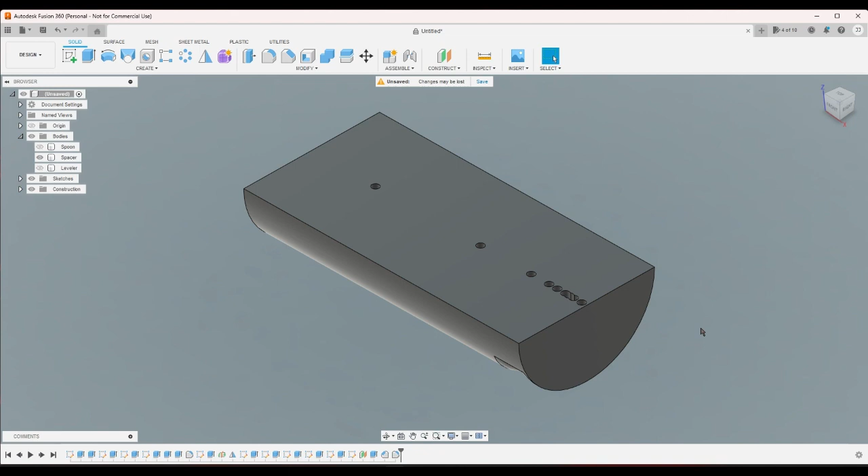I probably don't need the 1/8 of a tablespoon, to be honest, because I've never used an 1/8 of a tablespoon. I think I've seen a measuring spoon that is an 1/8 of a tablespoon. But if this works, I might actually just change the measuring cup to be the same basic design and shape. If the mechanism works, then I'll add a handle and a window to this.

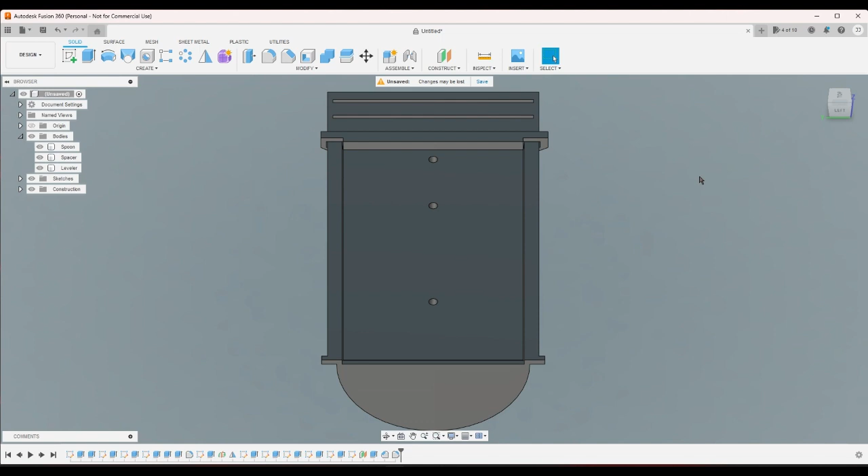I don't think I'll have the space to add lettering here, because these are less than 2 millimeters apart. I honestly don't know how I'll do that. I just thought of a way to do that actually. If this works, the way I'm going to put the letters for the measurements is the leveler will act as the line, pointed to by arrows. The arrows are going to have underneath them the text.

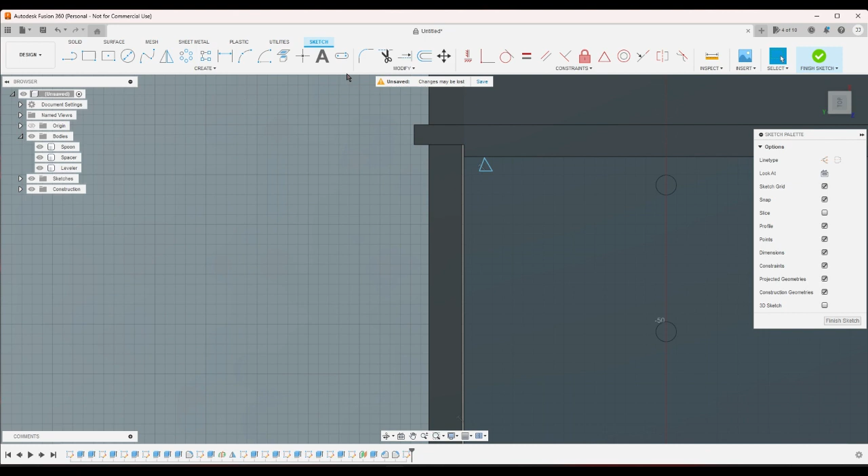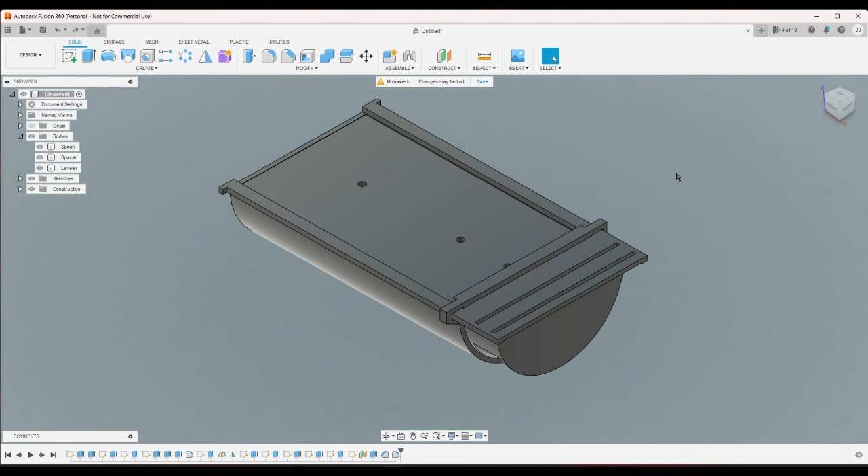Ouch. And then the text will be moved around like that. But looking at the size of the text, I don't know if that's going to be possible. So I might just write it very small. I have very small handwriting. Or I can carve it by hand. Anyways, now it's time to test this and see if it works. So I'll go test it.